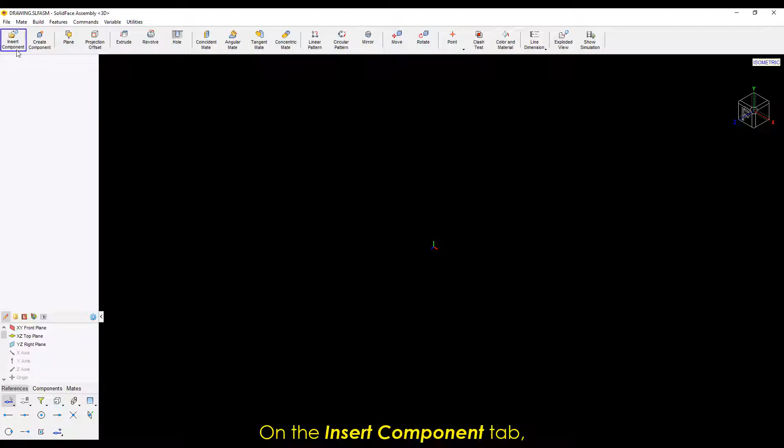On the Insert Component tab, we'll select the first part we're inserting into the assembly, the principal body. Then Jumelo, which is responsible for articulating our puller's claws.

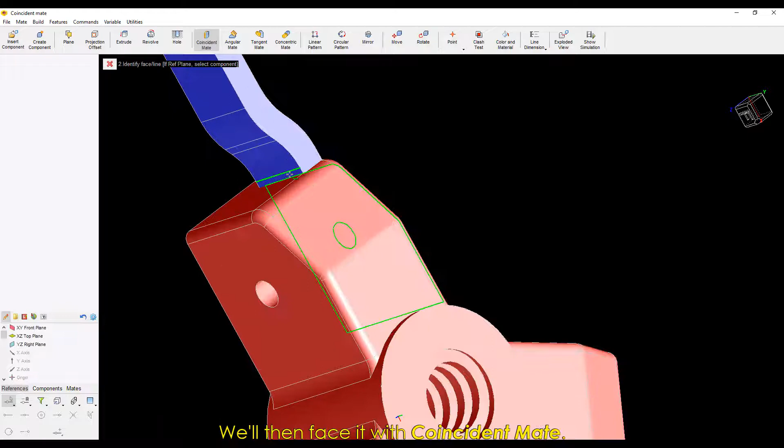We're aligning that part with the hole using concentric mate. We'll then face it with coincident mate. Finally, we'll use angular mate to align the part with the body. Like that.

Now we're adding another jumelo, and it'll be locked the same way. Center the holes with concentric mate, face it with coincident mate, and align it with angular mate.

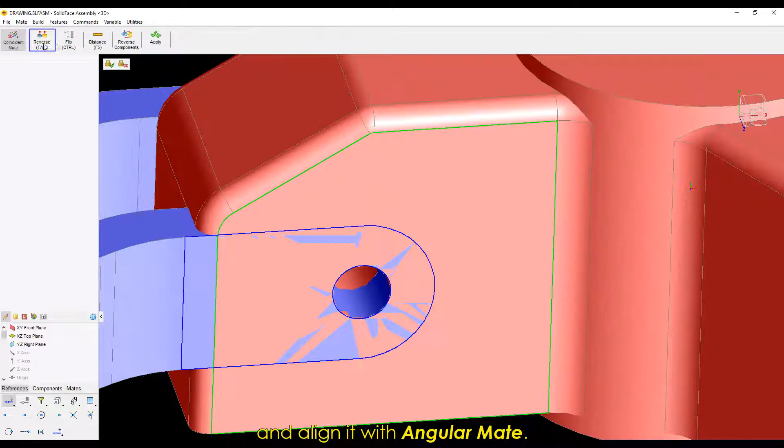Are you ready? Now we're moving on to the claw. We'll insert it and lock it to the jumelo's holes and align its faces so it can be in the right position. We'll add the rivets, the jumelos, and the claws.

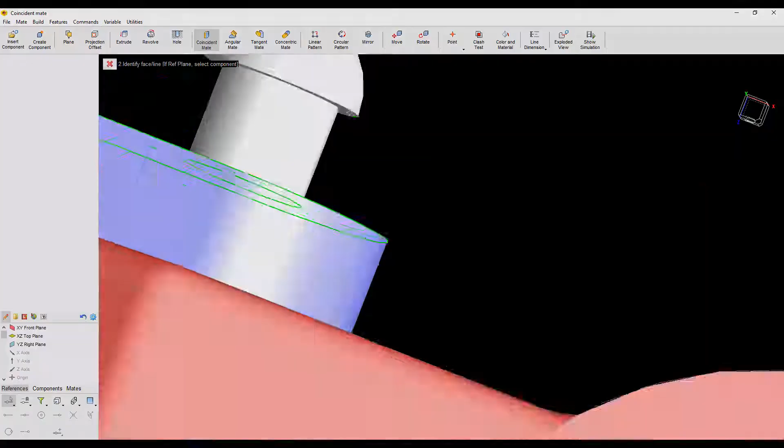After that, we're going to specify how many parts will be copied on the Quantity tab. On the Angle tab, we'll add the referential angulation, so the pattern is ready. As it's going to be 3 times, the referential angle is 120 degrees.

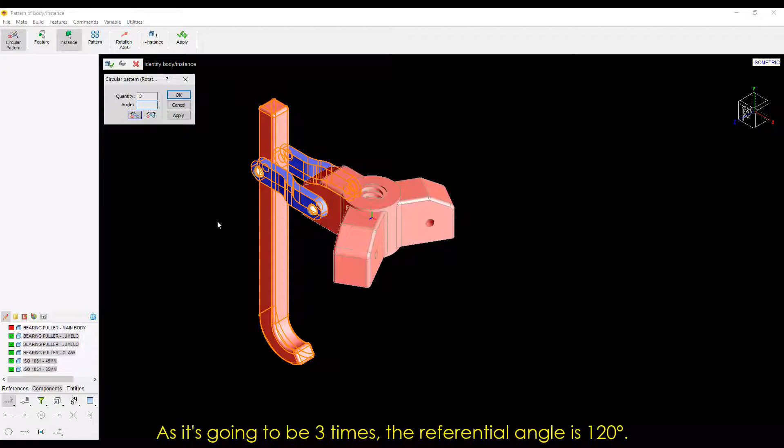We'll then select the rotation axis option to specify the axis to which the parts will rotate. So with that done, we can finish it, and the pattern is made. Easy peasy, right?

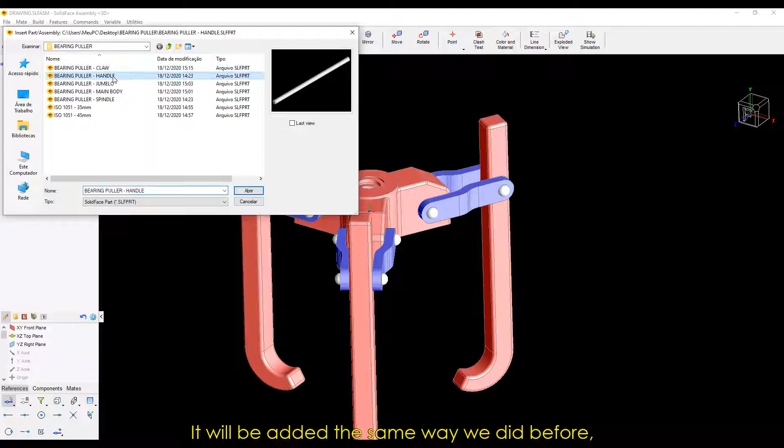There are only the spindle and handle left. Let's begin with the spindle then. It will be added the same way we did before, by the Insert Component tab. Now we'll select the concentric mate command and define the centers.

Select the coincident mate, that body's face and that spindle's face. The distance will be 50 millimeters.

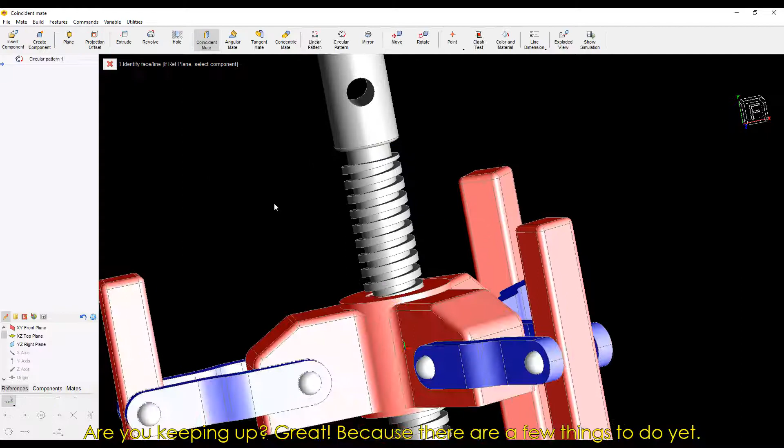Hey, are you keeping up? That's great because there are a few things to do yet. We'll add it by the Insert Component tab and use the concentric mate.

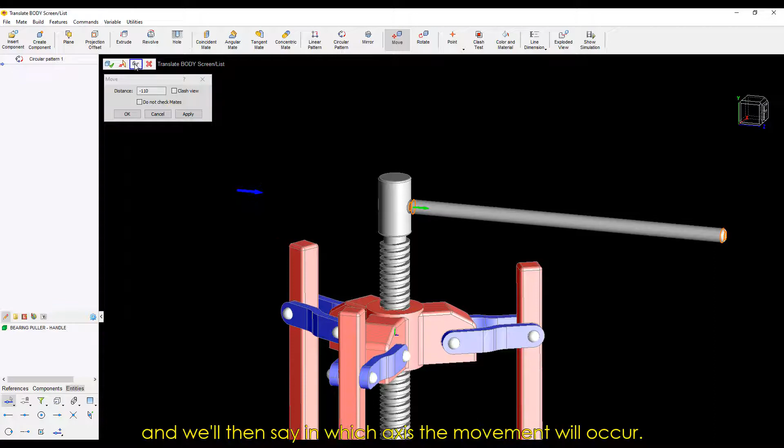To put the handle in its place, we'll use the Move command, selecting the handle, then clicking on the command. The distance will be 110 millimeters, and we'll then say in which axis the movement will occur. If the part has to go back, just add a minus in front of the measure.